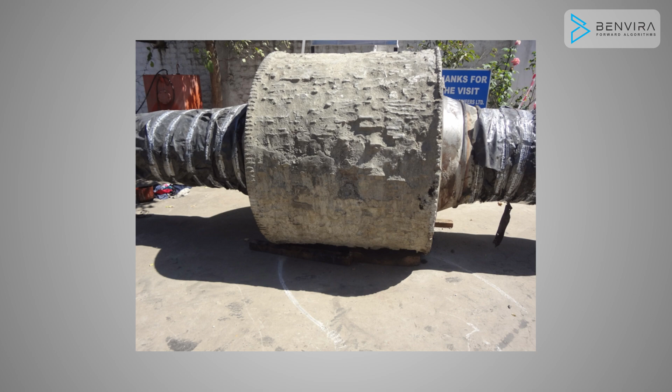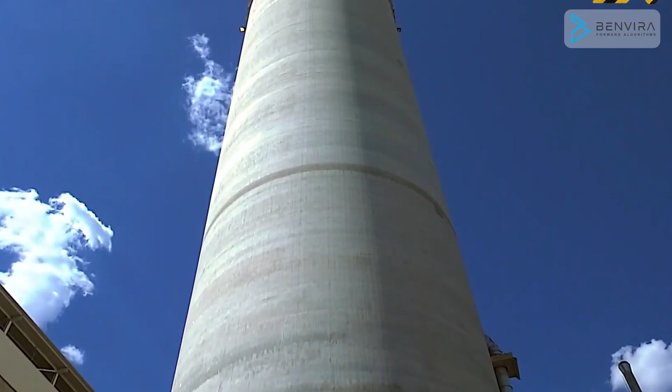Are your HPGR mills suffering from roller press rolls chunking problem? Damages on different types of rollers. Has your team ever encountered breakage of your costly roller press rolls? If yes, then we have a solution for you. No more worrying about RPR breakdowns and expensive repairs. Let's begin with identifying where such solutions are needed.

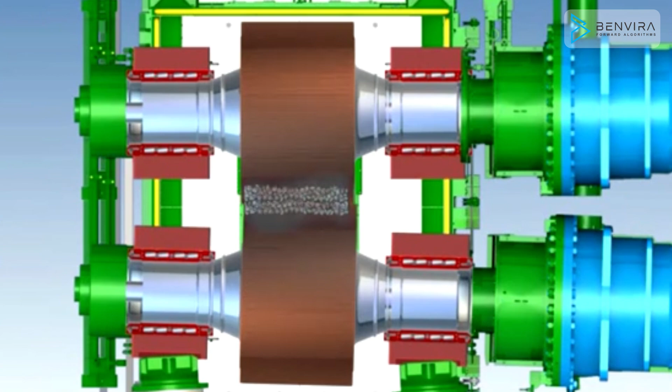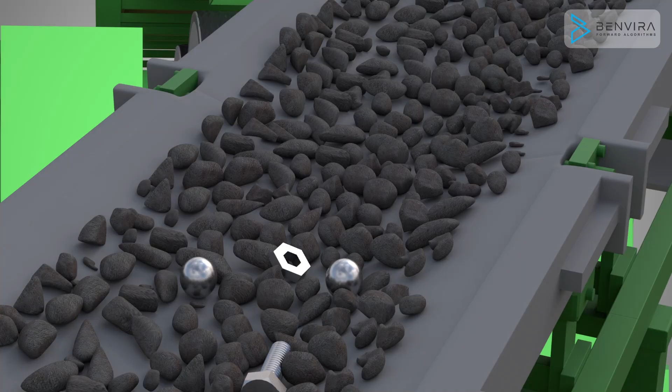This problem is commonly faced in raw mills, cement mills, and slag mills. High-pressure grinding rolls or roller press rolls are used to grind clinker, raw feed, and slag to make fine powder. To create fine powdered cement, the high-pressure roller press goes through rigorous wear and tear, including roller profile chip-off, chunking, fatigue, etc. The reason behind chunking is metal ingress along with raw material feed, which is difficult to detect.

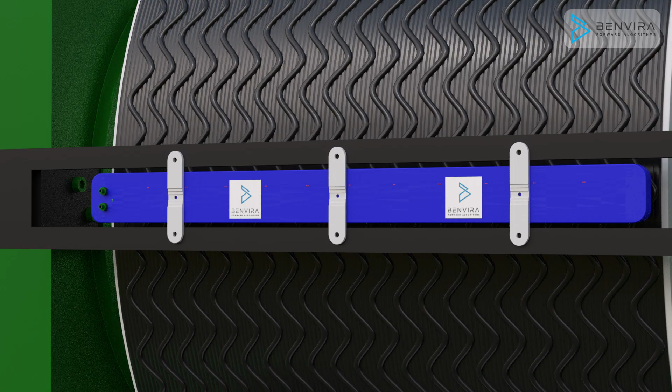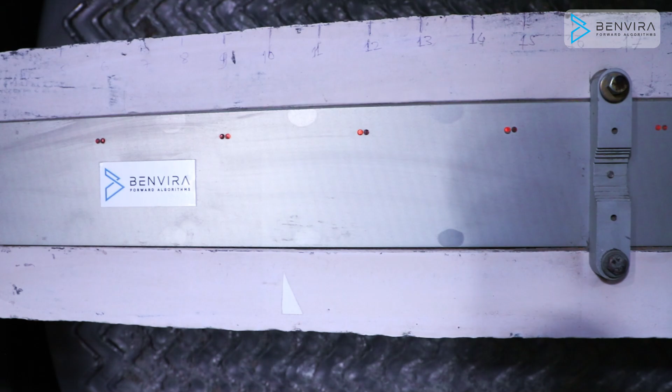Repeated metal ingress causes accelerated material fatigue that results in flaking off and chunking. Chunking leads to breakdowns, unplanned stoppage, costly downtime, reduction of roller lifetime, and various disadvantages. To take care of such issues damaging the roller press, Diffusion has brought the latest IoT system through Benvira. Introducing Benvira, an IIoT technology solution for units.

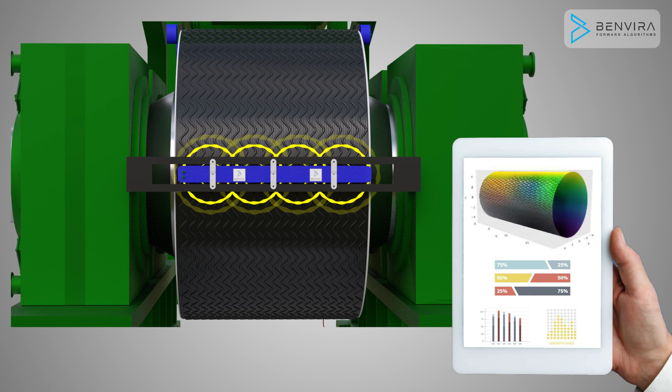Benvira system has an inbuilt real-time visualization of wear and tear. A display of wear map with different gradients and colors is available. You can easily monitor the real-time wear condition of the rollers on your handheld media devices without stopping it, and have 24/7 remote access of your roller on your mobile, laptop, or desktop. This makes roller maintenance easy to schedule and eliminates unexpected breakdowns.

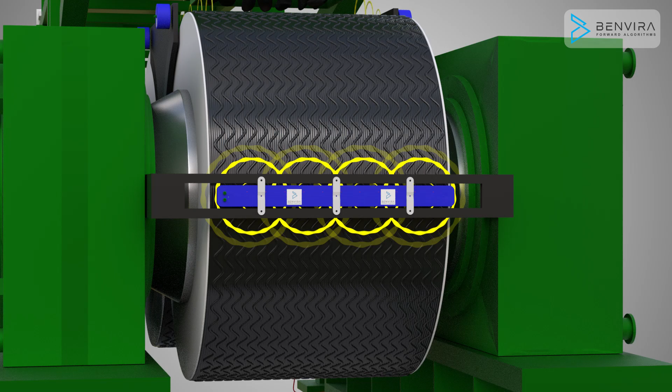Collecting 33,000 readings every revolution, the real-time data collection capabilities of the Benvira scanner enable it to detect the wear pattern without stopping the mill or opening the mill gate. A cheek plate sensor is installed in order to measure wear on the sides of the rolls. Scanners are installed on the cheek plate sides to monitor the tilt and correct angle of disorientation.

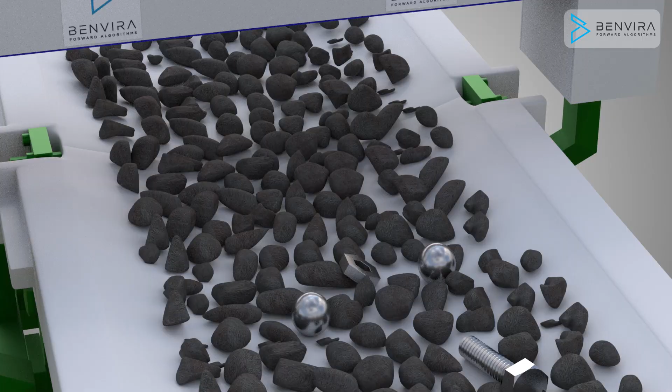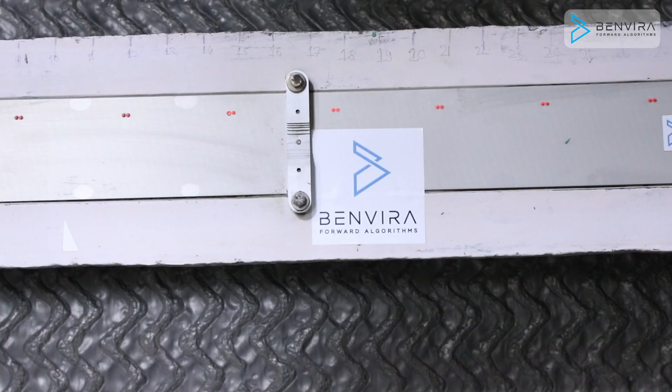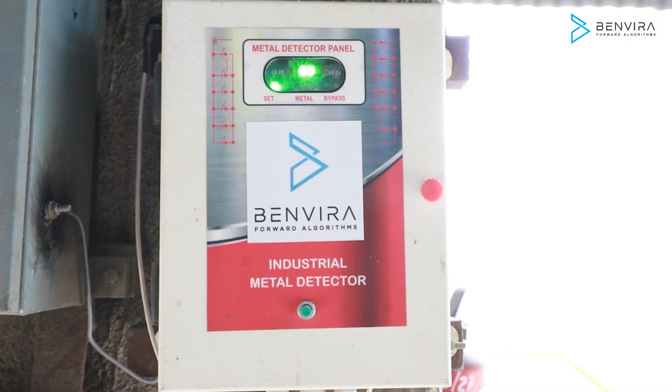Benvira's metal detection sensors are designed to scan for tramp metal parts from the conveyor belt, which are up to 16 mm, and may cause irreversible damage to the roller if fed to the roller mill. The way Benvira works, it becomes easier to take timely corrective actions to save the roller press from being damaged. Benvira is a complete detection solution with all metal sensing capabilities.